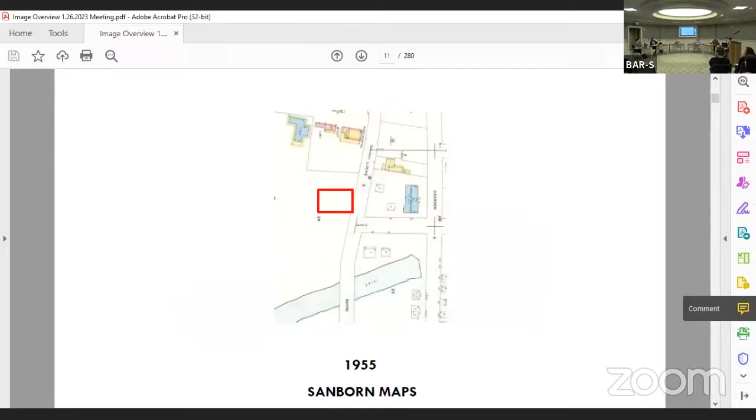65 Barre Street is requesting conceptual approval for 3 new row houses. They are new in the old historic district. Here is the location on Barre Street, an existing site photo, text of Barre Street, and then Sanborn maps showing the absence of structures in 1955. I will turn it over to the applicant.

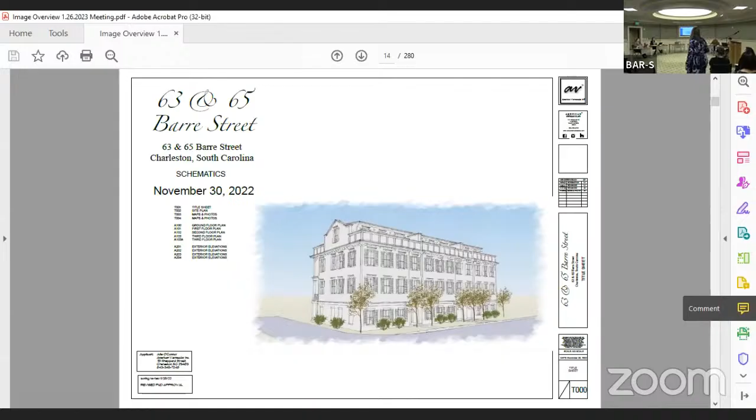I'm Julie O'Connor, the designer on this project. I'm joined with Tim and Colin Colbert, who are the owners. This project started with the purchase of 2 parcels of land, one of which has a 1-story ranch house on it, the other undeveloped. One of the properties is in the Halsey Park PUD, and when the Colberts purchased both properties, they incorporated the second property into the PUD as well. So now both properties, now subdivided into 3 parcels, are all in the Halsey Park PUD.

The Halsey Park PUD, just a quick zoning note—we've been dealing with and working with Lee—has its own zoning that is still in place, even though the ordinance has changed with regards to height and number of stories. So we've been working with Lee on that, and we do meet the zoning requirements for the height of the structure, overall height of the structure, and the number of stories. I think Frankie might be addressing that too. Could you go to the next slide, please?

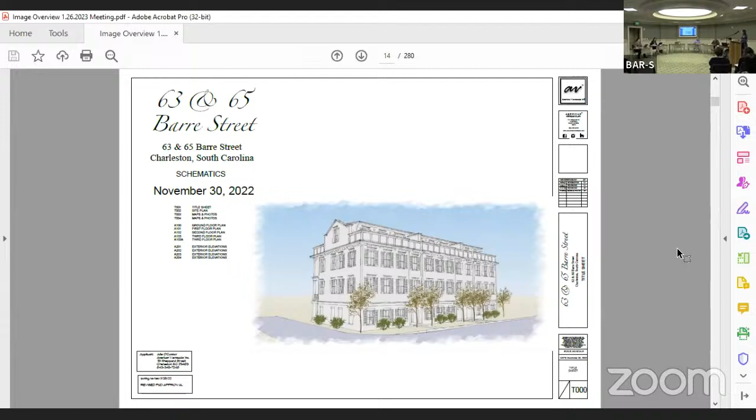We also submitted this project to the Halsey Park ARB. They have their own ARB, and they have approved it, and the HOA has written a letter of support. Specifically, they were very pleased that we're planning to leave some open space in the back of the property, since it's directly adjacent to and very close to this structure.

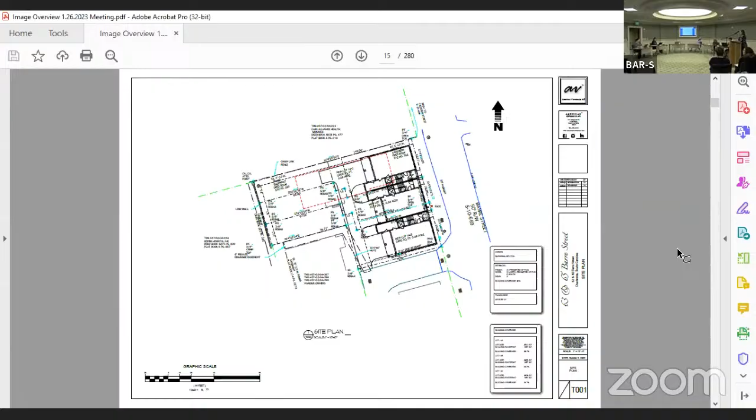And then as you go along Barre Street, there's a very large live oak tree, and then the Thomas Bennett house. So next slide, please.

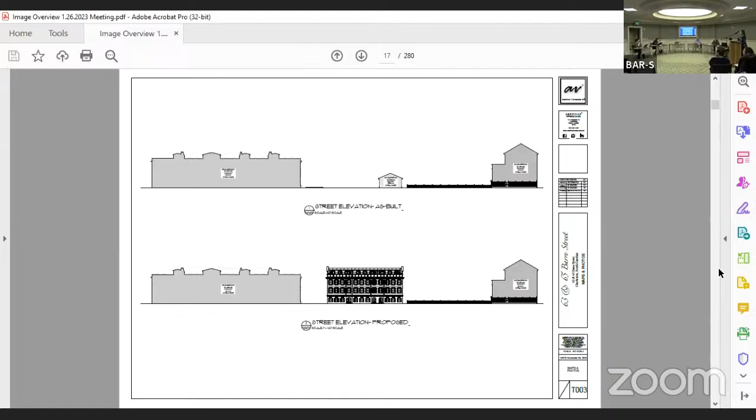Next slide, please. Can you go to the front elevation? So what we were hoping to achieve was a cohesive approach that sort of speaks a little bit to the existing row houses, but definitely has its own feeling.

So we would like to do siding. The other row houses are all stucco, so we thought a base of stucco would be a nice nod to that, while having the rest of the structure be siding.

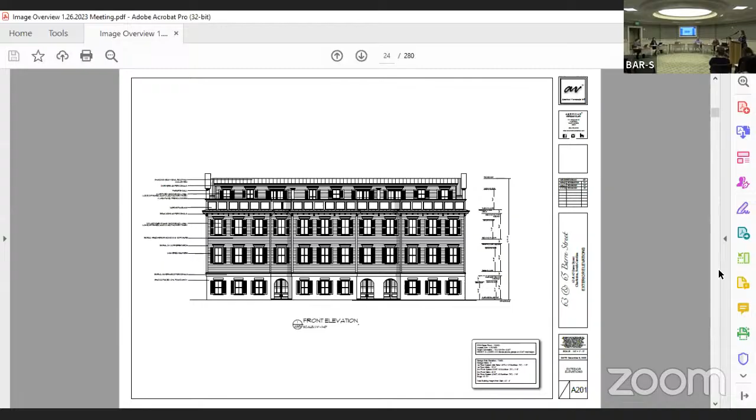We wanted to downplay the entrance in a way and not have a large set of stairs coming down, so we have sort of a recessed entry that sort of speaks to some of the streets like Tradd Street.

Next slide, please. And then this half story on the top, we wanted to set back, especially from the street, but also give an opportunity for maybe some outdoor space on the back. So you can see that we sort of set the half story towards the middle of the structure to get it away from the street and to also allow for some outdoor space on the back.

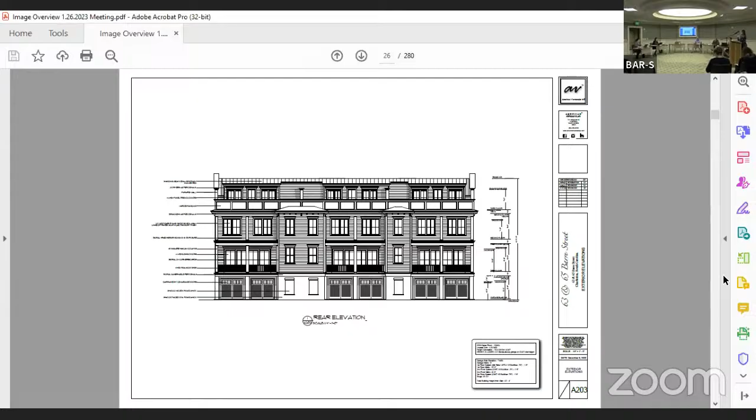Next slide, please. And then on the back, we have some porches and some nice elements there to enjoy that green space that we've created in the back for all of these properties to enjoy.

I'm not completely sure that's the way we're going to go with it, but you can see this kind of concept on the other row houses on Halsey and on Barre, and I think we'll continue to work on that. Definitely want to give them some privacy, but it probably doesn't need to be quite so tall.

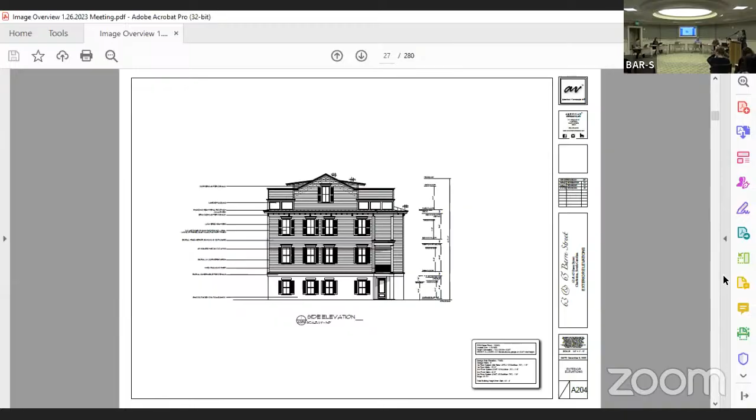And then we just did a few models just to show sort of how this would look. So you can just go through those from here.

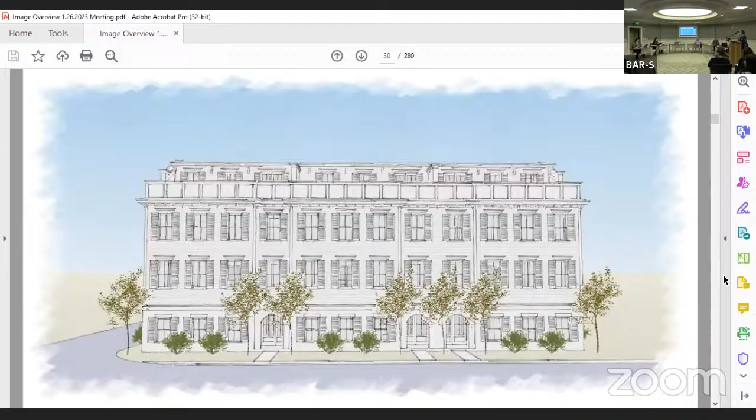And we just sort of took this parapet wall idea instead of a railing up top, and just started playing with some of those elements as we're working on the height, scale, and mass.

I'm here for questions.

Do my fellow board members have any questions for the applicant?

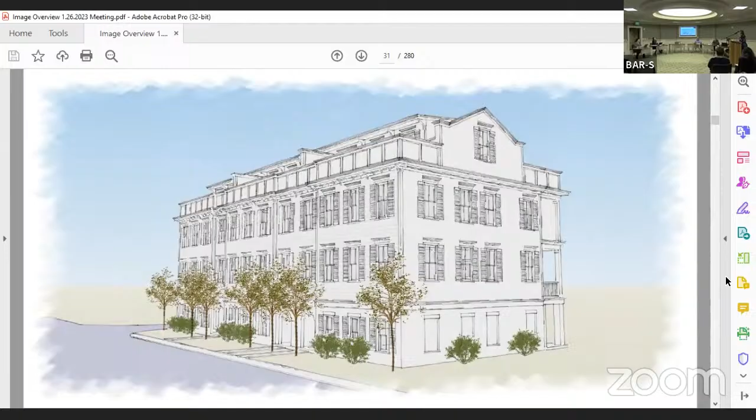Julie, you said you do have the blessing already of the Halsey Park. Yes. We have a letter of approval. And I apologize, I thought I had put it in the folder to be included in the slideshow.

So what system are you using for your demising walls? There's no parapet penetration at the roof line or anything like that, right? Right. We're just, the whole, you mean for dividing the two structures from each other? Yeah. Yeah, it's a double wall. Shaft wall.

I have a question regarding the railing at the top level. You said you could study whether or not it was railing or panel. What led you to go more panel than railing? I'm just wondering about massing and transparency. Yeah, I'm still kind of playing with it. I'm thinking whether it's a parapet or whether it's open or a combination of both. Whenever you have this flat roof type situation with a siding type of structure, I was just looking around in the city and seeing what I thought, and mostly they were parapets. Thank you.

Any other questions? Okay, we have no written comments. Do we have anyone speaking from the public?

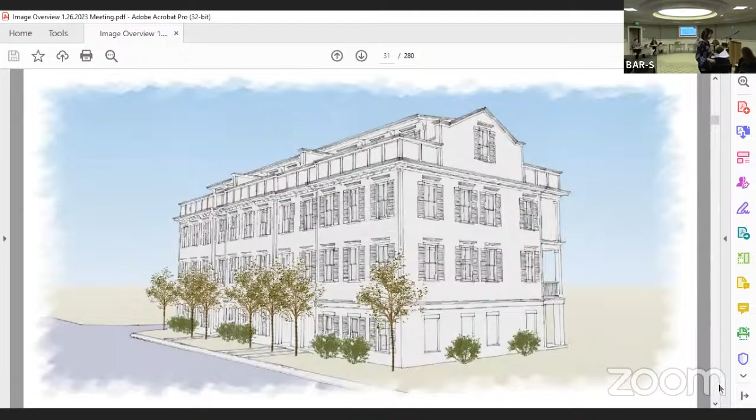Any more speaking from the public? Frankie, if you'll give the city staff comments and recommendations, please.

We did speak with zoning and they have confirmed the proposal is in compliance with the PUD and is within its allowed height.

Staff has met with the applicant and discussed a concern over the front entries, which is that the proposed arches screen the entries too much. Staff suggests omitting arches in lieu of squared off openings, centering a single entry door with side lights and arches, and or using a stained door system to make the entries more visible.

Applicant expressed they were willing to study this concern. Additionally, staff and applicant have discussed pulling back or angling the separation walls at the roof deck on the front of the building. These walls need to be scaled back or scaled down on the front of the building.

At the second floor rear of the building, the design creates what appears as infill porches. Staff suggests revising the exterior siding at these locations to be a larger lap siding and to potentially include a recessed panel railing like above. Staff also suggests restudying the detailing of the roof deck panel.

Staff recommendation is conceptual approval with staff comments and a final review by staff. Thank you, Frankie. Julie, did you want to respond to or clarify anything raised in the city staff comments or public comments? Yes, thank you.

Yes, we did meet with Frankie and Tori, and they did give us this list that we feel that we can address. We agreed with some of the comments and felt like there was definitely room to restudy these elements, and we're happy to do that.

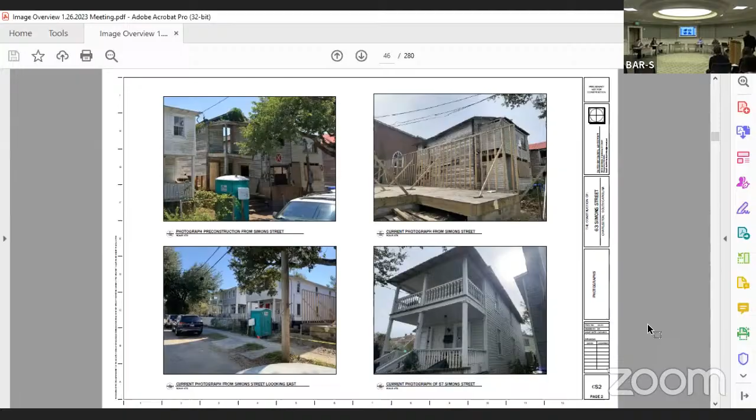I think we've gotten pretty close. One of the initial comments was with respect to the roof of the porch. Keep in mind that when we started on the house a year or so ago, the second floor porch was infilled. Our design now has the porch open on both levels, which I think is a dramatic improvement and much closer to the original design.

But the staff comments dealt with the actual roof pitch of that porch. The property here, farthest east, I think is the most original of all the structures, and that has a hip roof. You can see very clearly that is what my design shows, exactly that. So I think we've been able to maintain that. That's what I submitted, which was a concern from the staff at the first review.

Second was the idea of the rehab, because of the design of the house it's no longer a duplex, it's a single family residence. So on the first floor we propose a single door rather than two doors, which would have been in the original design. There's precedent for that in the house just two doors down - a single door with two windows, exactly what we have in mind. Seems silly to have two doors when you're just walking into the same room. So that's our position. Of course, all of this is open for discussion.

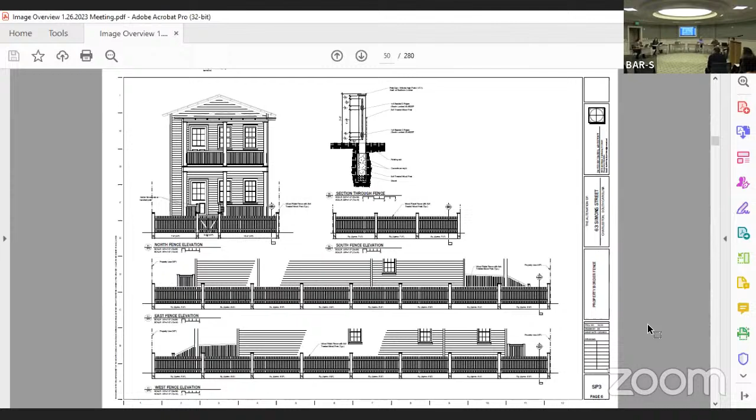The originally approved demolition on the original house—there was a front portion. This front mass to the right, we determined was not original to the structure, and we approved that it could be removed and the front porch restored.

If I can add to that—the previous submittal had a mass approved. It was essentially this, so for me to push back a little bit, I've been able to talk the owner into removing that in entirety, having double open porches, which was the original design.

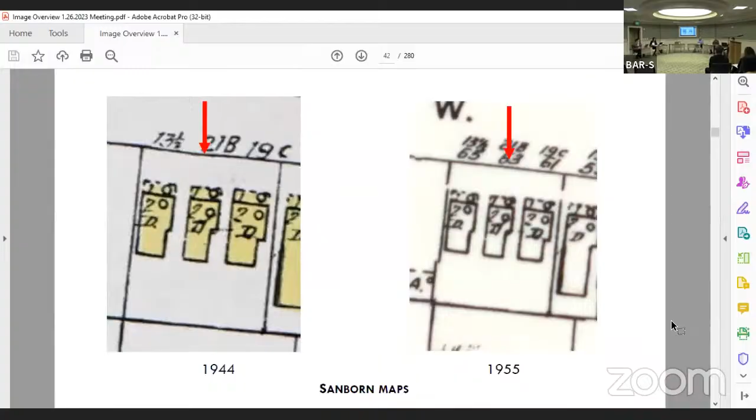Any other questions for the applicant? Do we have anyone speaking from the public? We had no written public comments submitted either. Frank, could you give us the staff comments and recommendations, please?

Staff did a little thinking about the two front doors to see if we could determine if it was originally built as a duplex. We haven't been able to confirm it, but the lot was bought in 1944, and the 1958 directories list two people with two different last names, but don't indicate a unit A and B. So we haven't been able to determine if it was a duplex when built or later converted.

Our comment was that the previous board motion adopted five staff comments, but we don't feel these have been incorporated. Because of that, we are recommending deferral.

Mr. Richards, did you want to respond to or clarify anything raised in the city staff comments and recommendations? Yeah, I think I've addressed each one of those comments one by one. For example, the roof comment—the initial comment from staff was that the roof didn't match the original design. Well, I think I've shown that it does.

So I've gone through each line item in the staff comments and assessed that they were not necessarily being followed—or that's probably the wrong word—but were received. I've offered to meet with the city and go through those in a discussion outside this, but we weren't able to do that. So I hope we can keep this moving forward, and if need be, work through the details with staff directly, if we can get at least preliminary approval here with final details to staff.

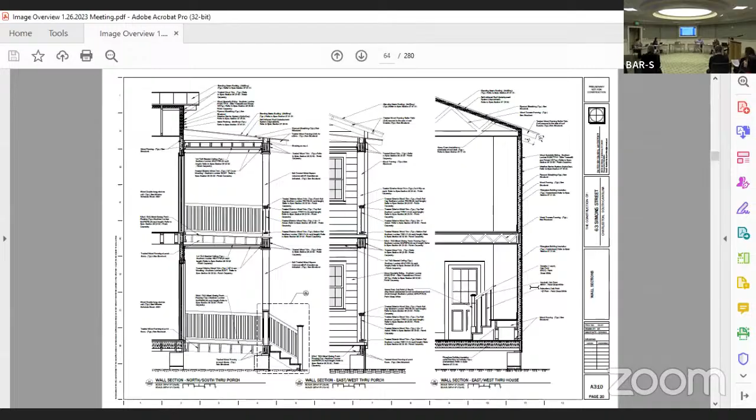Yeah, well, yeah. One thing I didn't hear, and again, thank you, Mr. Richards, for taking this on. I think I told you that last time. Yeah, we really appreciate that. Sure.

The one thing I didn't hear you address, maybe I just didn't hear it—and by the way, when I'm not looking at my phone I have the drawings, but I forgot my tablet—the brick bases at the columns, I didn't hear. Did you address that? I don't think I specifically addressed that, but I can. Real quick?

Yes. So that brick is not original. There's no way—see, it's got this pier here. It's not anywhere else in any of the other buildings. The stairs are wider. The brick is... there's no way it's original. It wouldn't have been constructed like that. It goes deeper into the porch. It's pretty poorly done as well.

But okay, you know, that was supposedly original. I'm quite certain that all the original stairs were all wood, standard stairs. And then the columns were full height—square, chamfered wood columns, full height. Okay.

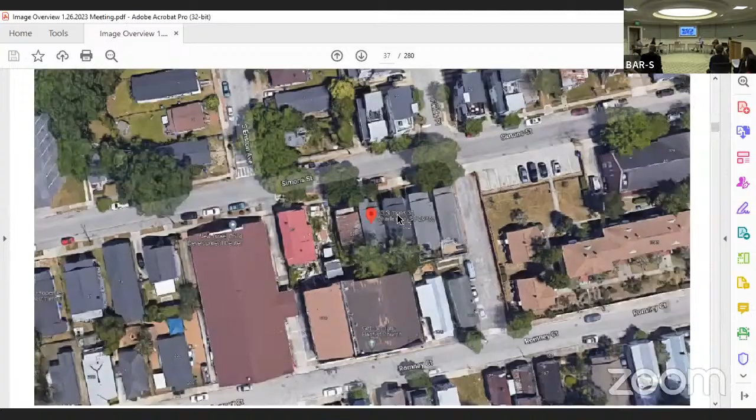The second point, Frankie, could you go to that Google Earth view I did, have a look down at... yeah, then that's not zoomable, is it? There should be another one. That's getting there. Is there... well, that might be as clear as it can get. Starting to get blurry at this point.

Yeah, I would say there is one thing. I don't think staff's comment about the pitch on that porch roof is ill-conceived, because fortunately when this picture was taken, the shadow line is just about right. You can kind of see this angle right here. And that's not a 45-degree angle, so pardon my French, but that's what's called a bastard hip, when two different pitches are converging. So I believe this angle is indicating it's not a true side, front hip, side hip condition.

In other words, they're not converging at the same pitch. Two points to add to that: the lines are 45, but they don't hit peak. So I copied the one at the eastern end. If you look at that porch, it's pretty well intact. I just made the assumption that was probably what it was originally. I see your point though. I'm not sure if that's been altered since, because they did significantly alter it when they put the addition onto the front, whether they modified that as well.

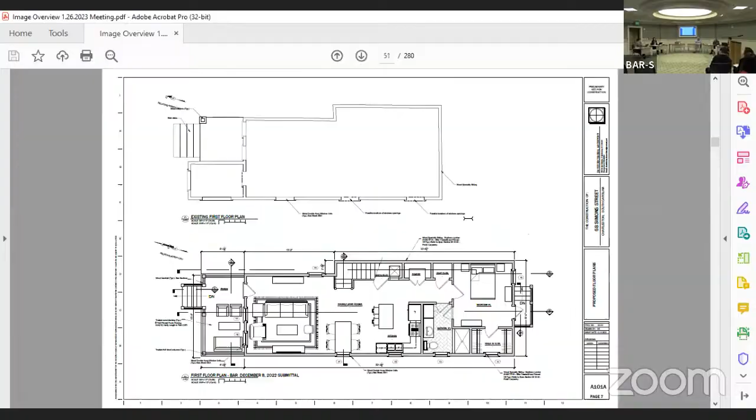Okay, agenda item number 3 is 12 Cannon Street. Frankie, give us an introduction and overview when you're ready. 12 Cannon Street is requesting conceptual approval for a new rear addition and restoration of the existing house, dated category 4 in Cannonborough-Elliotborough, circa 1870, in the Old City District. Here's the location on Cannon Street, some existing site photos, context of Cannon Street, and a Sanborn map showing the history of the property. I'll turn it over to the applicant.

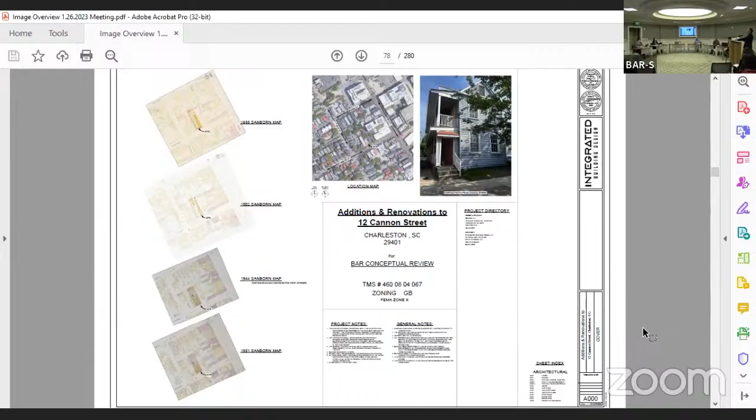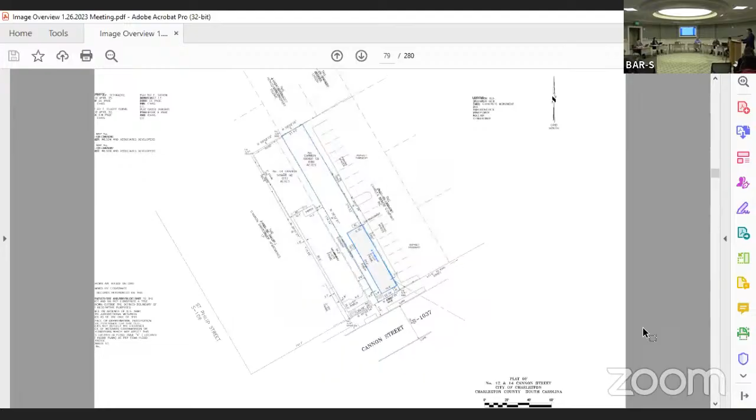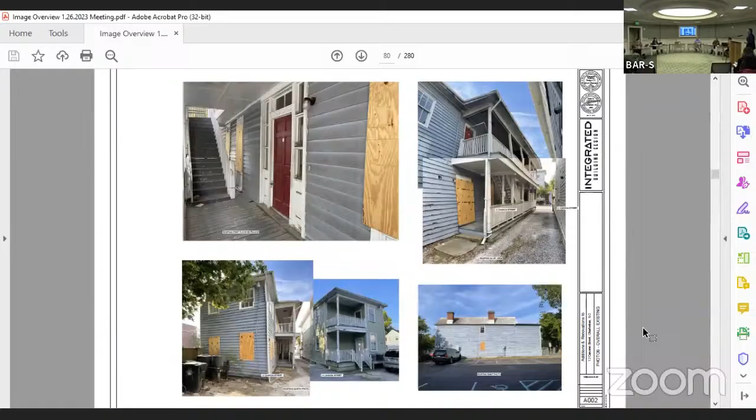Thank you, I'm Eddie Buck, representing Brahma. Unfortunately our architect had something come up at the last moment and is unable to be here, so I'll be presenting on his behalf. As stated, the original structure predates 1880, with an addition that predates 1940. If you could go to the next slide - as you can see in the survey, there's a small drive between 12 and 14 Cannon Street. 12 Cannon Street is about half as deep as 14 Cannon. Next slide please - in these photos you can see the structure is in poor condition, certainly needs attention sooner than later, and unfortunately in the last 6 months has experienced some vandalism. Next slide, please, showing more photos of the condition.

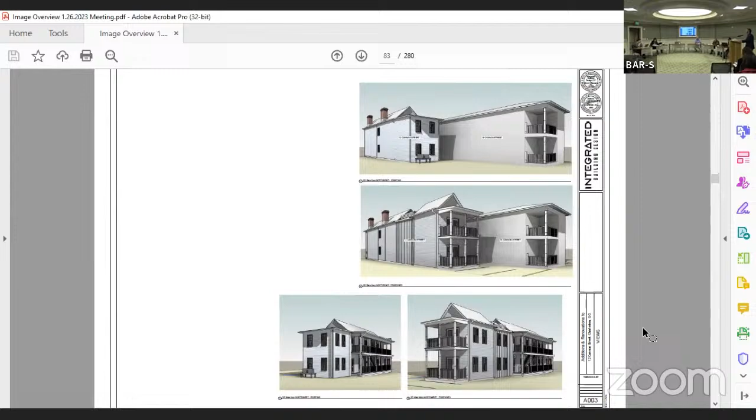Just showing a little bit of the context of the adjacent building and our current building.

Here's showing the existing condition. You can clearly see in the top left what was the original historic structure, the addition with the sloping roof that was added, the front elevation, and then down below showing what we're proposing. You can see from Cannon Street that there are no proposed changes to the front elevation.

It's strictly to restore and preserve the current look. As for the design, what we've tried to do is put an emphasis on what was the original historic structure, what was the first addition, and then what we're proposing as a current addition that ties more to the original structure, but also adds a porch in the rear to add some cohesion between 12 and 14 Cannon Street.

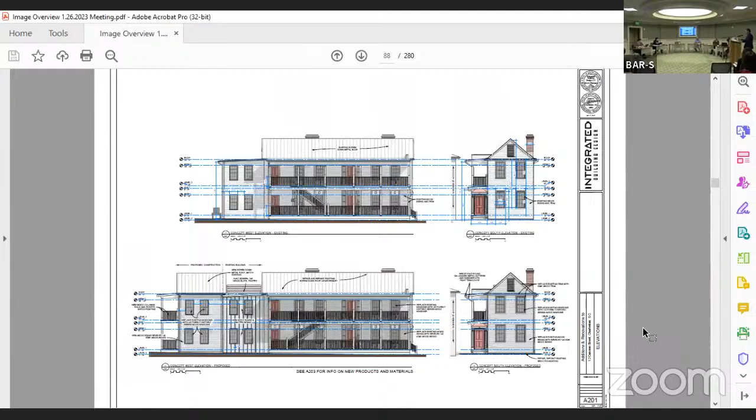Here gives a little more definition of how we're really trying to put an emphasis on what was the historic building, using the first addition as really a hyphen, keeping the flat roof on that portion, going to a vertical board and batten siding, and then using some screening above for the mechanical units. To the right of that, the new addition goes back to a pitched metal roof.

It ties back to the original structure with the traditional wood siding. Just again, a little bit on some materials.

Again, with that, the main emphasis on this project is to restore the project. It is an older Charleston single, and the addition is to add some flexibility with the floor plan. So, with that, I'm happy to answer any questions.

Do my fellow board members have any questions for the applicant?

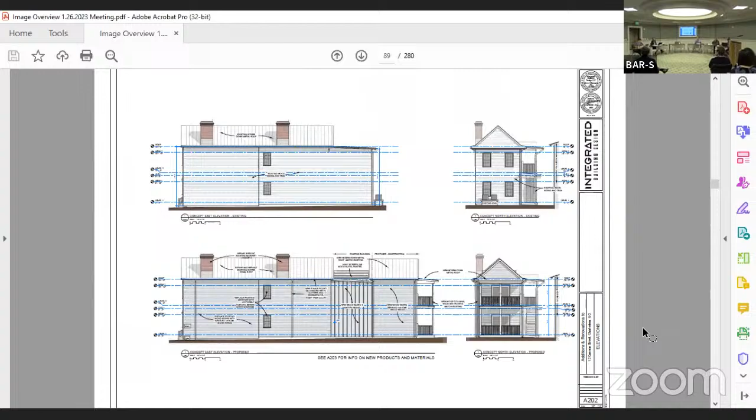Anyone else from the public? Thank you. Would city staff give their comments and recommendations, please?

Staff had two observations. There was a note on removing trees, and removal of any trees must be approved by zoning. Also, this project did receive a special exception from zoning for the addition.

Staff comments: we recommend retaining the existing siding on the hyphen area, lowering the roof on the new addition to be subordinate to the main body of the house, differentiating the addition from the main body of the house. Siding and windows should be replaced on a case-by-case basis depending on the condition of each.

We did have that question about the chimney rework, but also because on the drawing where that was noted, it looked like the chimney changed color, so we were just making sure that didn't indicate a portion of the chimney being retained and a portion being rebuilt or something along those lines. But it could just be a drawing. I don't believe so — I think the changing color is more from a waterproofing system that was put on. I understand, we just didn't know what that indicated.

And then all features should be repaired rather than replaced wherever possible. Staff recommendation is for deferral with staff comments.

Thank you, Frankie. Mr. Buck, would you like to respond to or clarify anything raised in the public comment or these staff comments and recommendations?

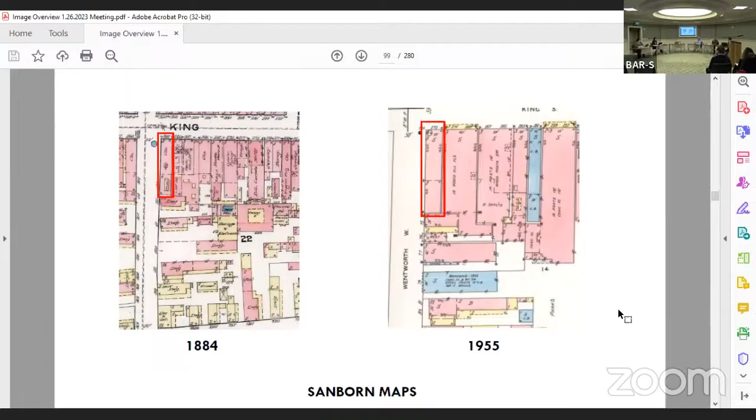This is the location on King Street, existing site photos, context of King Street and Wentworth, and a Sanborn map showing the structure. I will turn it over to the applicants.

We're looking for conceptual review of 273 King, some light modifications to the north facade. The building on the corner, the southwest corner of Wentworth, these alterations are part of a white boxing of a vacant tenancy that the owner would like to market for lease. The building is currently occupied by a clothing store here and then a hotel above called the Green.

On the bottom right, you can see the interior extents of the suite in question, projected onto the exterior. We have these three storefront windows and this recessed entrance. The building was built around 1840, and it's been a clothing store for a lot of its history. This is the existing plan, with the three large storefront windows in question and the vestibule here.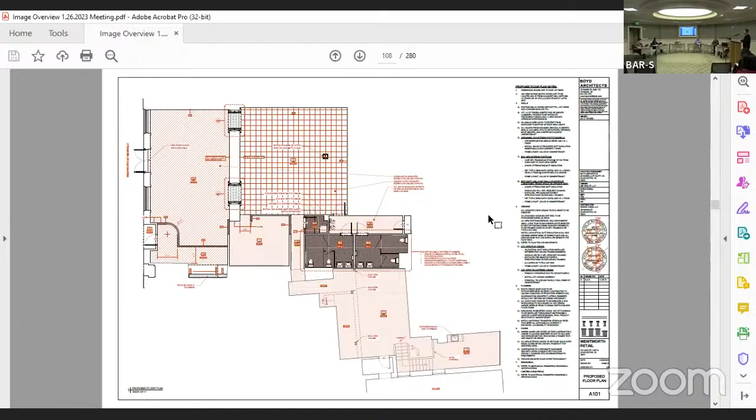Let's go to A101. So you can see here we're proposing dropping the sill of the middle storefront window and introducing a new entry to the suite. This is much more conducive to a retail setting and better street presence for this suite. Practically speaking, the existing vestibule will be partitioned off and create a common utility room, since there are electrical panels and other utilities common for the whole building. This creates a shared utility room without having to go through another tenant space.

Let's go to 201. This is the existing elevation. The four middle openings are the suite in question. As best we can tell, the facade openings have been modified in the past a decent amount. It's tricky to tell at this stage, but there's a window in colored green that's filled in right now. The vestibule in our suite is not original - we have a photograph from 1901 where it doesn't exist. There's actually a window here, this window doesn't exist, and there's a window here, kind of where the floor plate is now. That photo from 1901 shows it appears as though it's one of these windows, filled in by 1901, so we can assume it was a window, then filled in, and now it's this vestibule.

Let's go to A201. There are really two things: dropping the sill of that middle storefront window, and adding new entry doors, which will be two-panel painted wood doors with the top panel being a full light, which is common on King Street - you see it throughout. The other thing is removal of the transoms, which right now are filled in with plywood and don't match the rest of the building, which has glass with fabric on it. So we're taking out the plywood and putting in glass. The recessed entry vestibule remains unchanged from the outside; it just needs interior reconfiguration.

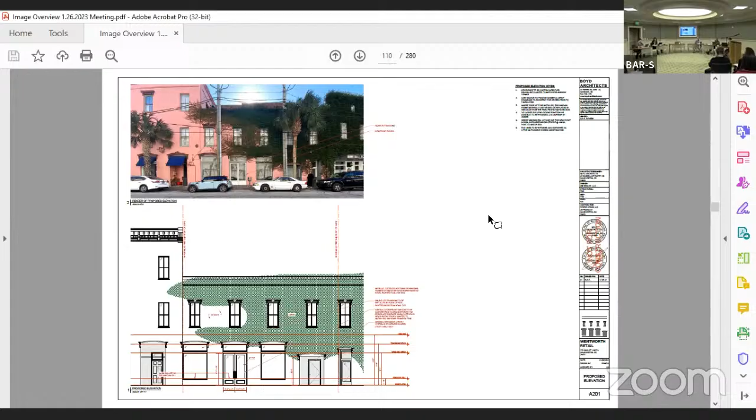Anyone else speaking from the public? All right, and we have no written public comment. So Frank, you can give us city staff comments and recommendations, please.

Staff just wanted to make an observation that the proposed change is a sensitive operation that respects the width of the existing opening, and we think this change to be reasonable and reversible. Staff recommendation is for conceptual approval with a final review by staff. Mr. Boyd, did you want to respond to or clarify anything raised in the public comment, staff comments?

Public comment and the applicant's presentation is now closed. We'll move into board discussion and a vote.

Yeah, I definitely see the points. I think there's a practical issue here. Number one is the insinuation that we're approving outswing doors ahead of engineering. Number two, the fact that there are going to be doors that are basically presented at sidewalk level. I think it'd be fairly short-sighted to think that there's not going to be an application for an awning within a year. Weather starts hitting that door, water starts hitting that door, it's potentially going to be an issue. And I'm not saying that we need to be preemptively considering an awning, but I think practically that might be something we might be looking at soon.

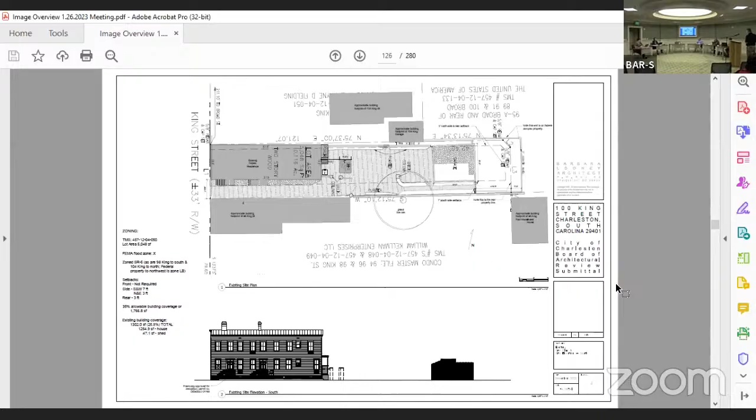Next slide. This is the original site plan. Next slide, these are the walls that are existing now. Next slide, a better picture of them. Next slide, more pictures of it.

This is our proposed site plan. Next slide. The top is our original plan for the guest house, and the one below it is the elevation with the revised floor plan. Next slide. The bottom left is the first floor, the top left was the original second floor, and the bottom right is the revised one we're turning in now, between the walls, and the second floor.

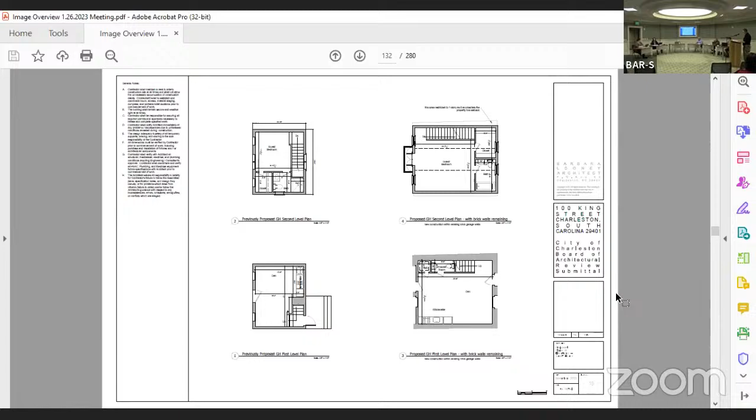On the revised plan, we also did not put windows on the north and south elevation on the second floor, to minimize the impact for the neighbors. Next slide. This is the existing brick wall elevations; upper left is the east elevation, the right is the west, lower left is the north, and then the south. All the walls are two courses wide and are unreinforced brick.

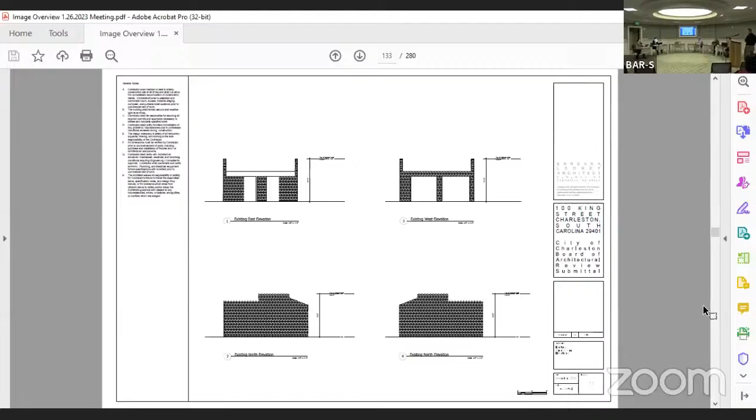Next slide. The previously proposed west elevation is upper left, the upper right is the currently proposed west elevation, the lower left was the previous, and the lower right is the one we're proposing today. Next slide. These are the previously and currently proposed east and north elevations. Upper left is the previous, upper right is the one we're proposing, and the lower left is previous with the lower right being what we're currently proposing.

Next slide, that's us, thank you. Do my fellow board members have any questions for the applicant? I'm sorry, your name was Tom Bellino—is it B or B? B, Bellino, yes ma'am. No questions?

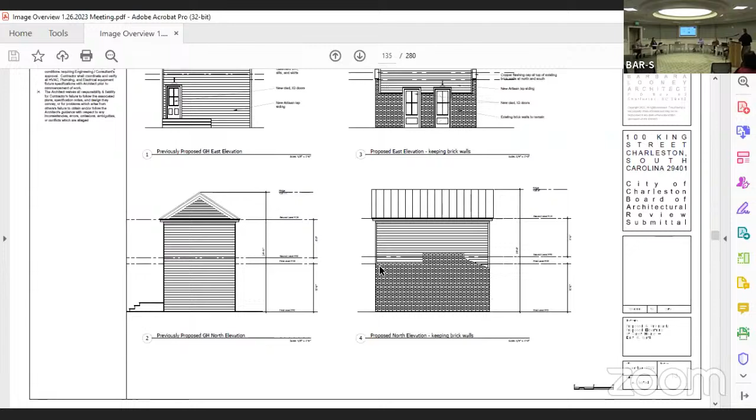Was there a particular thought behind reorienting the direction of the roof ridge? I'm looking at your previous and proposed west, or front, elevation. On the proposed one, the orientation of the ridge changed—before it was side to side, now we're presenting a gable. I don't see any reason for that. I don't know if it's because of the way the original building, the original brick—go back a couple slides, Frank, if you would—where it shows the pictures, you can see where the old roof used to be. So that's why we're changing the roof this way, because it might look kind of odd going the other way.

Any questions? Thank you. Okay, do we have anyone speaking from the public? We have no written comment.

Laurel Bay with the Preservation Society of Charleston. The PSC appreciates the applicant's response to the board's previous direction to study retaining the brick ruins as part of a new guest house design. We feel this proposal warrants continued study of how the guest house engages with the ruins to better distinguish the two periods of construction. The proposal to fill the former footprint creates undesirable proportions that read as an unfortunate evolution of an existing garage. The scale and proportions of the previous design are more characteristic of traditional dependencies in Charleston, and we think there is an opportunity to pursue the original design direction while incorporating the ruins as a unique architectural element. Thank you.

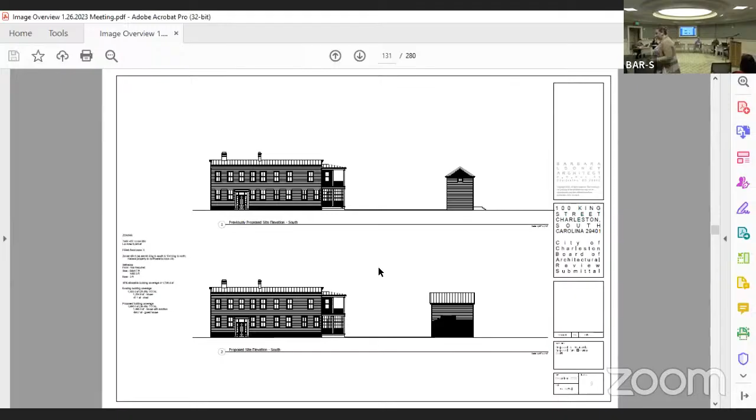Any other public comment? All right, Frankie, if you'll give us city staff comments and recommendations, please.

Okay, staff just had two observations that we felt the previous board motion has been addressed, and that the proposed garage is subordinate to and architecturally compatible with the existing structure. Therefore, we will recommend conceptual approval with final review by staff.

Thank you, Frankie. Mr. Bellina, did you want to respond to or clarify anything raised in the public comment or the city staff comments and recommendations? We were just trying to do what the board was trying to do, you know, and keep the original.

Public comment and the applicant's presentation is now closed. We'll move into board discussion and a vote. I have a question for staff, or maybe some board members that I wasn't there. But the ruins, do they show, or is it characterized as the ruins from the 40s? Or was it mandated that they keep them? Are they historic?

Staff felt comfortable approving it. Tori was going to approve the demolition at a staff level. But when the board reviewed the proposed project, they felt that the ruin should be restudied to see if it could be incorporated into the design.

I don't remember if we were able to verify the age of the ruins, other than that they weren't on the most recent Sanborn we could find. There was some visibility concern. I think where we landed, in a semi-uninformed state, was that we know the brick is old, but we don't know the age of what's there, or whether it may have been an older structure modified to be a 2-car garage.

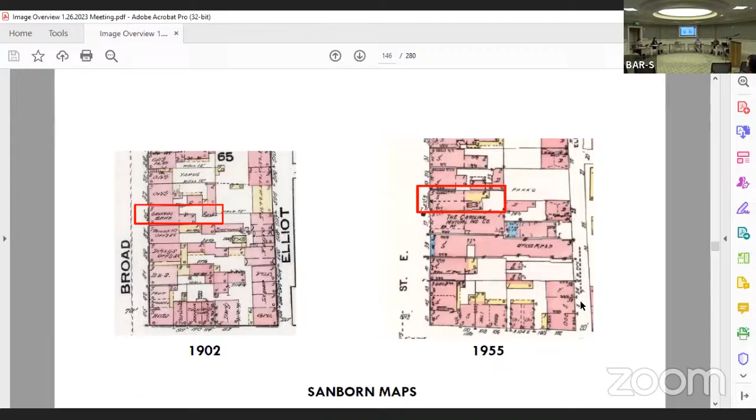Good evening, my name is Rhett Morgan. Not sure what happened, the summary seems like it was cut short. So just real quick, the primary scope of this project would be to reconstruct this storefront there on Broad Street. And then the second component of the project is a small addition at the rear as well. So just to quickly give you a quick overview, the primary structure, a 4-story masonry structure there that fronts Broad Street, was constructed in the 1700s.

There's a series of somewhat unfortunate additions and modifications that were made over time towards the rear of the property and also on Broad Street as well. And to make matters worse, some of the past owners had neglected this structure pretty greatly, so it's in pretty poor condition. The good news is there's still quite a bit of historic elements and fabric that are intact with the interior, and it really has the opportunity to be a real gem. So we're very excited about this opportunity. I should probably mention too, my clients will be pursuing historic tax credits with this project as well, and coordinating that with the state historic preservation offices.

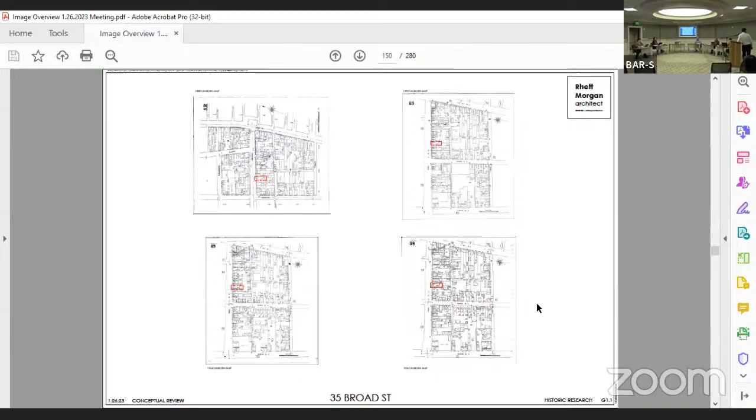So with that said, if you don't mind, the clicker - I don't have the clicker today, I misplaced it, sorry. The Sanborn maps, you can kind of see the evolution of different additions and whatnot at the rear of the property. If you can flip to the next slide, please. And then so we have some older photos. The photo on the right from the 40s is basically the inspiration of what we're trying to bring back for that storefront on Broad Street. The one on the left is a photo from the 70s that kind of just shows some of the evolution of what's happened down on that street level over time.

And if you don't mind clicking the next slide. So the bottom right image is what we have today. Over time there's basically a stucco finish that's applied at that ground level over the original brick and wood storefront. There's nothing left of it.

The openings obviously are still at those historic locations. So the idea is to go back to those locations and reconstruct as best we can with that image that we have along Broad Street.

Then the top left photo is taken back from Elliot Street. You can see some of the additions that were done, most visible being this two-story CMU block structure, and you can see peeking out another addition. The image to the top right is within that parking lot off of Elliot Street, a little closer view showing the state of disrepair, unfortunately, to the structure.

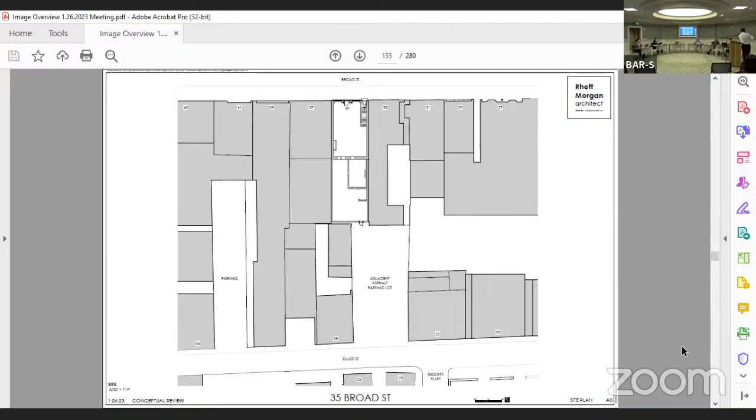Just quickly, the site shows how the property sits in relation to Broad and Elliot and that parking lot, giving you a glimpse of the rear of the property there. A good portion of the building, as you can see, is kind of tucked back behind 29 Elliot.

So if you can go to the next slide, please. So really the scope of the work on the first floor is primarily just the reconstruction of that storefront on Broad Street. If you can go to the next slide, please.

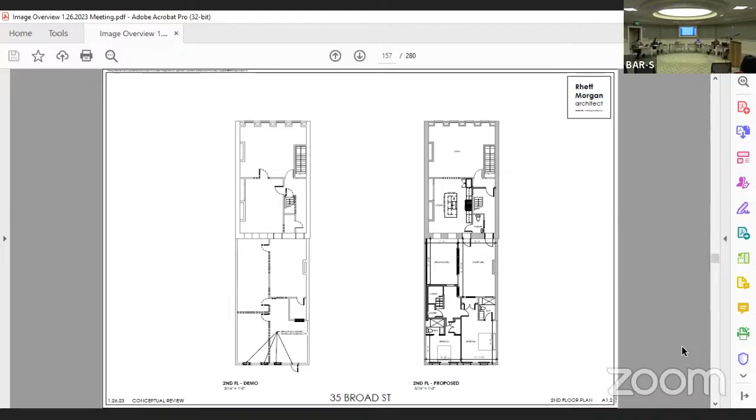And then you can see here this interior courtyard basically that we're trying to create, to capture some of those original openings to the original structure so we can bring light back into that space. And then the footprint basically of that addition.

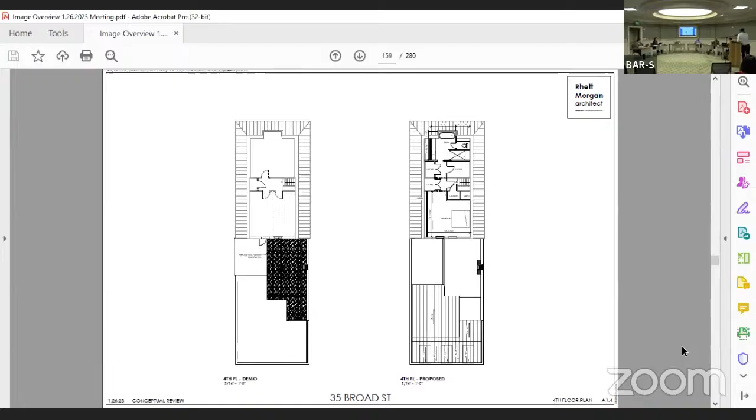If you don't mind, the next slide please. You can see the darker element is where that roof will be popped off, and then basically a void created there. If you could slide - just skip along.

Next one, please. Mr. Morgan, you've got about 2 minutes left. Oh, okay. So I think it's pretty straightforward - it shows the reconstruction of that storefront on Broad.

If you go to the next one, please. This really isn't visible, you can just keep looking through - this is just more information. So you can kind of see the simple gable form there of the addition, which is all that would be seen from Elliot.

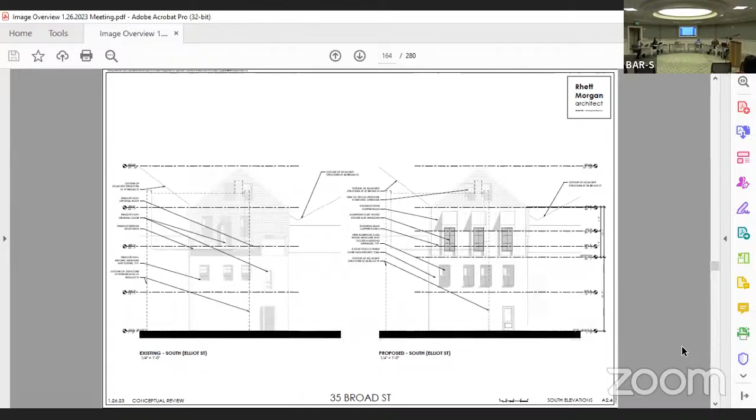Basically the concept is a simple gable form, shed dormers, trying to bring the scale of that addition down and retain the residential feel and nature of the structures back there. Standing seam metal panel, pretty simple detailing.

You can kind of see the outline of the structure on Elliot that basically obstructs the view there. Really none of this is visible - this is just for informational purposes. If you could click to the next one.

Sorry, it's very slow today. No worries. That just shows how it sits in the storefront, the streetscape on Broad Street.

This is not pronounced right, sorry, this is a little hard to read, but essentially you can see how this addition is tucked back behind that structure on Elliot. The intent of that form is to bring the height down, keep it subservient to the original structure, and maintain that residential feel of the structure back there.

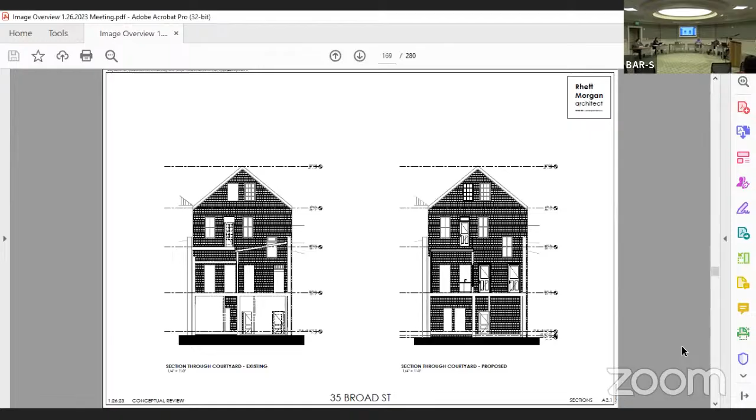You can go to the next slide. You can kind of see this is that roof we're talking about taking out to recapture some of the openings.

This really, obviously, we pulled away the building too broad, but just so you can see how this relates to the addition to the original structure and that simple gable form.

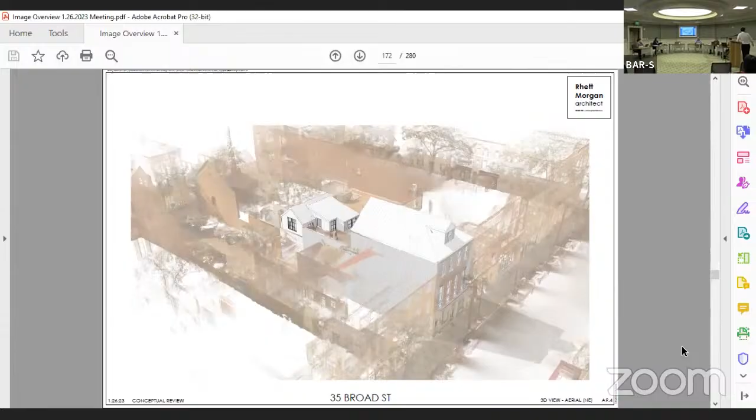An aerial from Elliott to show how everything relates. And an aerial from Broad. Obviously none of this is visible from the right of way, just to show how everything relates.

You can see that interior courtyard we're creating to basically reconstruct and capture some light into the back of the original structure. I think that's it, really.

Thank you, Mr. Morgan. Do my fellow board members have any questions for the applicant? Just a very quick one - I think most obviously your drawings of Broad Street were focusing on the storefront and revision.

The dormer is drawn slightly different up on the roof with that sort of circular, what might have been a fan light at some point in time. It shows on the 70s photo and the 40s photo. You're not changing anything? No, sorry, that was just a graphic error. Okay, I'll get that updated. I just wanted to make sure, because it's not drawn on there, that's not part of it.

No, the only change would be to that storefront on Broad, and then just rehabilitation. Gotcha, thank you.

And then the ground floor commercial, upstairs is 2 units? Yes. Okay, and then there aren't any zoning issues related to anything?

Anything proposed for parking required or setbacks? No, not as far as parking or setbacks.

So we are working with them as far as the number of units. There were 4 meters there, and so it'll go down to the current plan of 1 commercial tenant on the ground floor, and then 2 tenants in the upper floor - one at the second floor and the addition, and then the 3rd and 4th floor would be another tenant. So we're working with them, and depending on how many tenants we have, we might end up having to get a special exception just for the use, but as far as the volume, setbacks and everything...

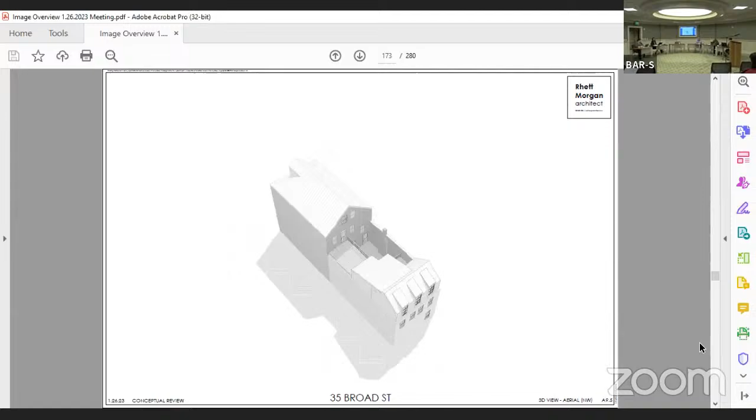Staff just wanted to make some observations that the proposed front facade is reconstructing a historic storefront, and that the rear addition will not be seen at the same time as the front facade. The proposed addition is differentiated and subordinate, and it complements buildings adjacent to the rear, including one with a copper roof that overlaps this slightly, complementing each other nicely.

Staff recommendation is for conceptual approval with a final review by staff. Thank you, Frankie. Mr. Morgan, did you want to respond to or clarify anything raised in the public comment and city staff comments and recommendations?

Sure. I appreciate the feedback. We were able to meet with Historic Charleston and Preservation Society to walk them through and get their input on what we're proposing, and we'll certainly take those comments into consideration in the development.

All right, public comment in the applicant's presentation is now closed. We'll move into board discussion and a vote.

Would you like me to do something for you? Oh, well, I can figure it out. It's a little screen, but I can just. It would be bigger, that was all. That's okay, my eyes probably see better there.

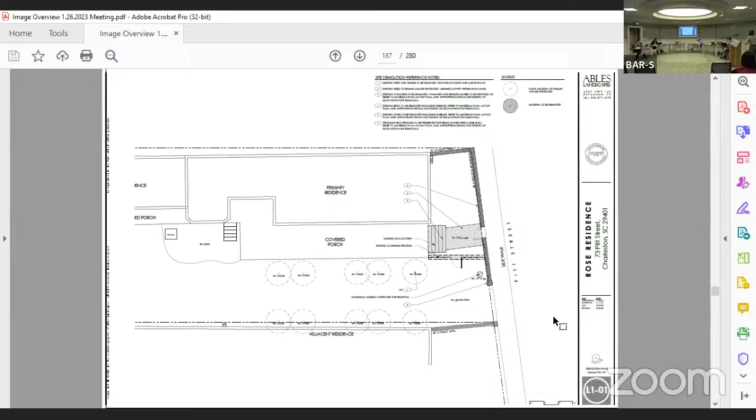This next page just shows the demo of the areas, removing that aluminum fence. The magnolia is already gone. The stucco knee wall while salvaging the ironwork.

This shows the overlay of the approved plan, keeping with the same footprint of the knee wall, but raising it up to an 18-inch knee wall made out of brick with that salvaged wrought iron. You want to keep that up, keep that, and put it back, but raise the overall wall height to 5 feet. Keeping the existing gate, but modifying it to keep with the aesthetic of how it is, adding a vehicular gate, adding a brick apron at the beginning, a ribbon brick drive with mondo grass in the middle, and

blue slate chips on the sides. And then regarding the steps up to the home, doing brick facade with bluestone treads and iron railings.

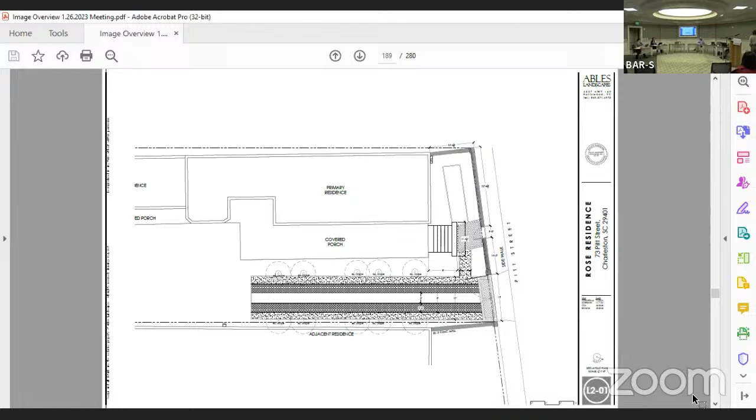Currently, there is a water meter within the rolled area curb of the sidewalk of their driveway, so we would be asking to move those water utilities over. To the next slide.

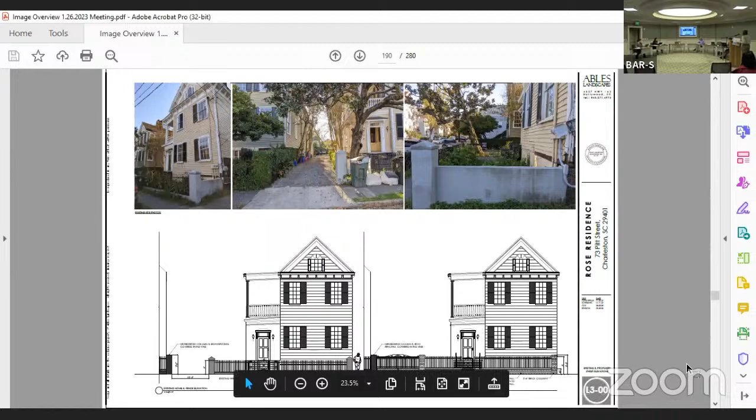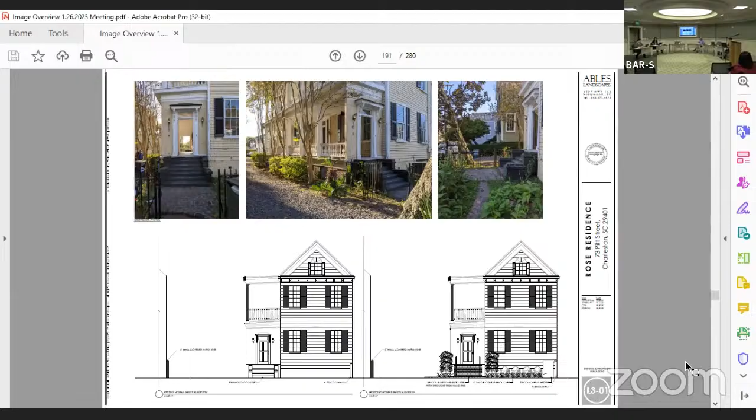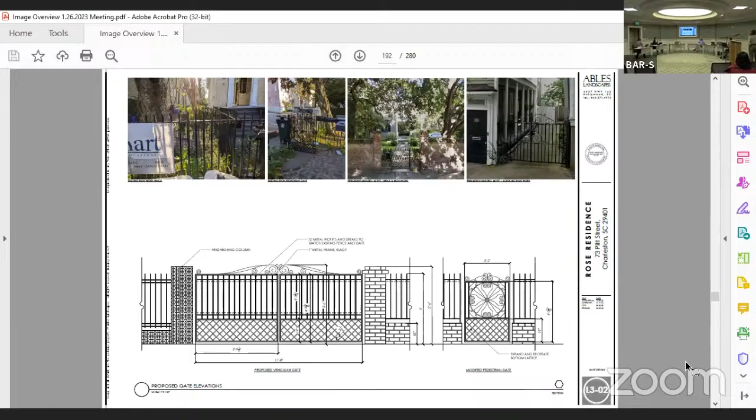Go to the next slide. And then these just show further details. They are requesting a 5-foot wall along that side where there's that 3-foot stucco wall, so that would tie into the new brick columns. As I said, the ironwork would be around 5 feet tall. They're asking for 5 feet tall.

The columns would be about 5.5. The new brick steps, just treads of bluestone, 2-inch thick bluestones, just a classic wrought iron with a lamb's tongue handle at the end, herringbone brick walkways, and then within the drive, a brick apron and a brick ribbon drive with slate chips on the exterior of that. I think that's the last one.

Do my board members have any questions for the applicant?

Are they going to do any kind of automatic opening device on these gates? Not that they have requested, no. Anything else? Thank you.

We have no written public comment. Do we have anyone speaking from the public? Yeah.

Laurel Fay with the Preservation Society of Charleston: This proposal appears to be generally well conceived. However, we would request more information on the thought behind this proposal, specifically if this is to address flooding concerns or just aesthetic reasons, as well as the age of the materials being proposed for replacement. We ask the board to require more information in a subsequent submittal.

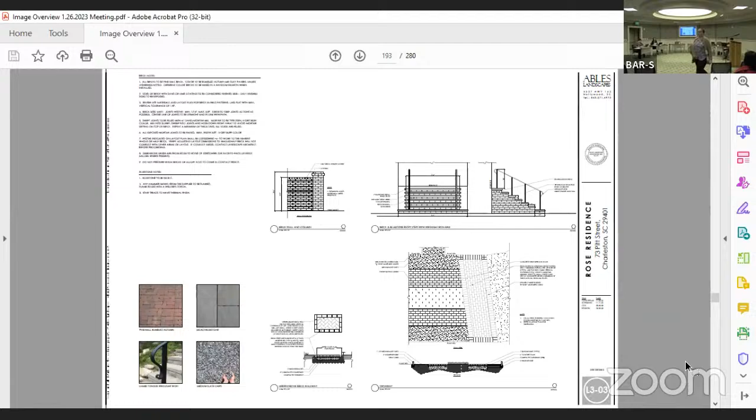Staff comments: the proposed wall and ironwork are appropriate for the location. The brick stairs coordinate with the proposed wall, and the gates complement the existing pedestrian gate. Unless this project is here only because it's a category 2 — if it were a 3 or lower, we would review it as staff. Staff is recommending a final approval.

Does the applicant want to respond to or clarify anything related to public comment or city staff comments? Regarding the public comment, they just love the aesthetic of the area. We use Carolina brick as part of all the brick surfaces. As far as date goes, I don't have anything on the ironwork, but we want to do it.

Public comment and the applicant's presentation is now closed. We'll move into board discussion and a vote. Mainly gonna look towards Glenn on this — this is kind of his wheelhouse. Deferring to Glenn, hear what Glenn has to say.

I think it's a nicely developed proposal, and the only real clarification needed is the age and scope of work on the older ironwork pieces that are there. Otherwise, I think it's all very appropriate for the neighborhood, and it sounds like that's what the clients are looking for, in terms of materials, and that's what she's adhering to.

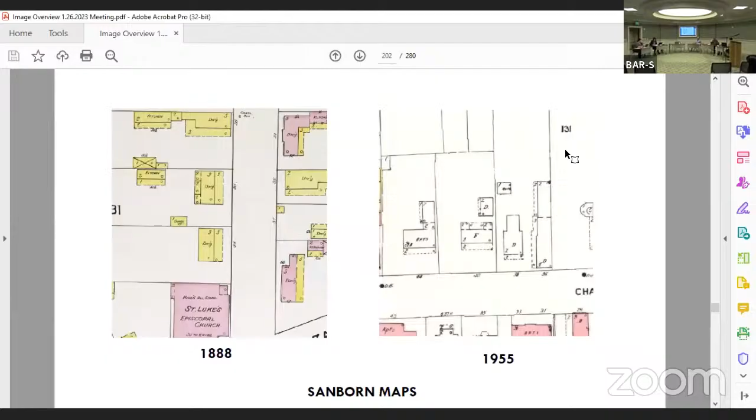Good evening, my name is Wolby McSwain, I'm the designer working with Ms. Neighbour on this project. Our proposal is basically to install a pool behind an existing garden wall in the rear of the property. To do this, we also need to complete a pump house to run the pool. We're going to bring out the wall off of the existing wall, matching the fabric and construction, and nestle a little pump house in this area next to the pool. I believe the next slide will provide further detail.

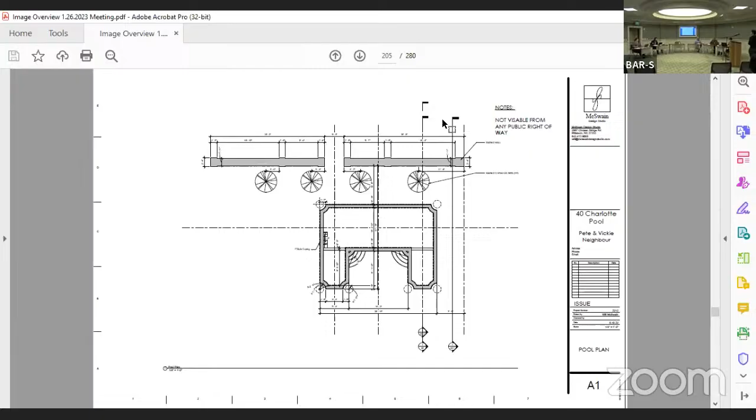Our design intention for this was to have nothing visible from the public right of way. The wall would be coming out here and then adjoining the pump house itself, and then continue on through.

Here's an elevation of the proposed wall. Again, we were going to match construction and materials with this wall, matching the existing stucco and the brick detail of the garden wall.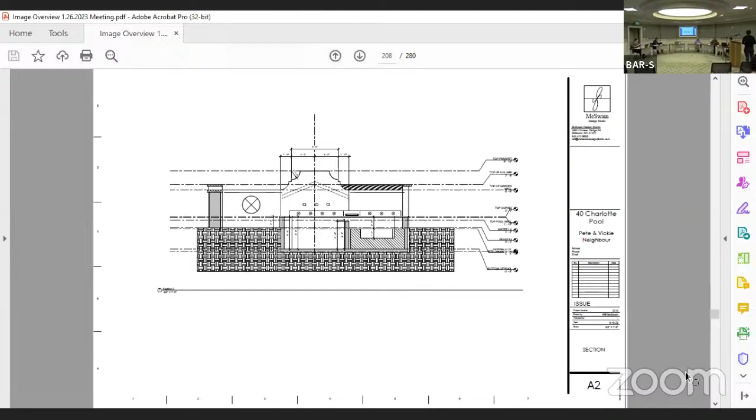Here is a study of the sight line from the public right of way to show that the roof line of the pump house is going to be just below the public right of way. That's all I have. Do my fellow board members have any questions for the applicant?

You don't have any photos within your presentation, is there? Of this current site behind the house, I can provide this for you.

Thank you. Site plan wise, I think we've approved some other things not too long ago, an existing deck behind. Well, there's been sort of driveway landscape approvals, and I thought part of that approval was something to do with the wall. I don't know if that stuff has been done yet or not, but it would be nice to understand fully what's happening on the site.

Also, I don't really understand why the survey doesn't show the full property, which should be a standard. The full property needs to be on there. And then there's a grand tree back there that's been whited out of the site plan, so I don't understand what's happening there either.

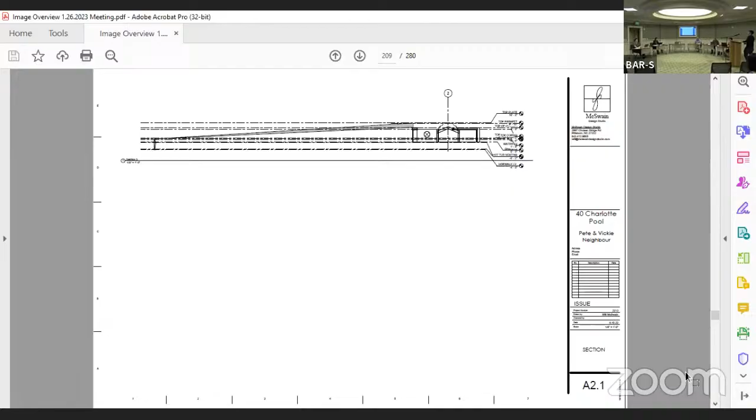So if you go to A 1.1 — right here, this sycamore, no, the white circle. There's a white circle where a tree's been whited out. I do not know, this was the site plan that was provided.

My purview on this project has only been coming in to design this pool. Any other questions?

Thank you. Do we have any comments from the public? We have no written comment.

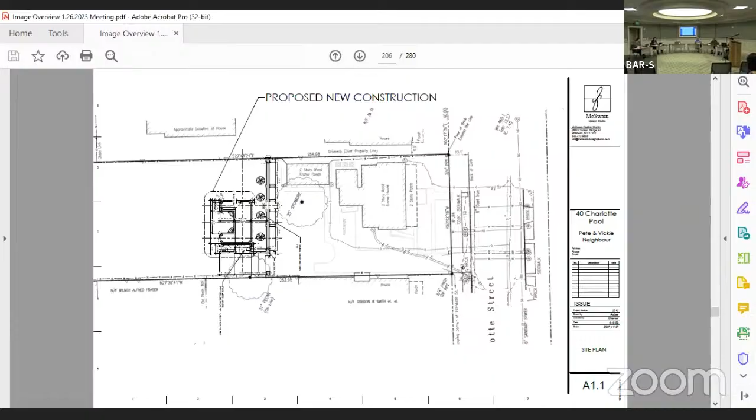Frankie, if you'll give us city staff comments and recommendations, please. Proposed changes appear to be minimally visible and limited to portions of the structure that can be seen over the wall. However, staff do have some questions.

We're curious about what are the materials and the finish of the parapet wall. We would request additional elevations, including a street view, if that section number 3 is not what can be seen from the street. So, what exactly we will see from the street, how thick is the ornamental wall, and is there more than one? And what portion of the mechanical room can be seen above the wall? Staff recommendation is to defer for additional information.

Thank you, Frankie. Did the applicant want to respond to or clarify anything raised with the city staff comments and recommendations? Yes, we were going to match the materials of the new ornamental wall to the existing wall, which is a standard stucco wall. We were going to use CMU and then brick stucco with the brick. There's an ornamental brick cap on top, so the wall would match what's existing on the site.

All right, public comment and the applicant's presentation is now closed. We'll move into board discussion and a vote.

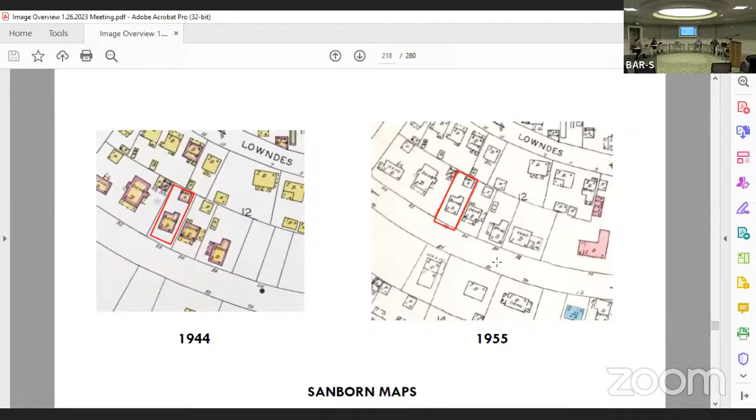So the roof is a pyramid roof, and the home faces south. The proposal is to put the panels on the east and west sides to minimize visibility. The existing roof is shingles. I walked up and down South Battery to see just how visible the east and west sides are from the street, both sidewalks. There's a huge live oak which screens most of the view from the angle of the street. There's a smaller couple of crepe myrtles which really don't screen anything at all.

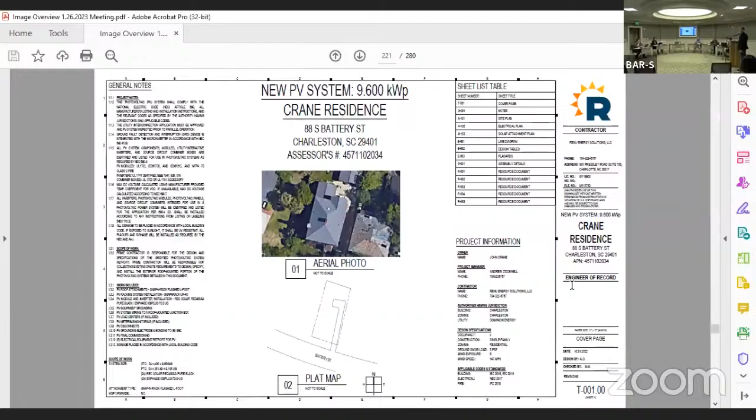The whole majority of this package is really technical drawings and specs of the panels and inverters and the rest of it. So in terms of appearance and visibility, they really don't add much to that situation. Do my fellow board members have any questions for the applicant?

I'm good for the moment. I'm trying to pull up some photos. Thank you. Do we have any public comment?

Well, Historic Charleston Foundation?

HCF has reviewed the application for solar panels at 88 South Battery. The existing roof is not historic, and conceptually we have no objections to solar panels. Instead, we suggest that the solar panels on the sides of 88 South Battery should be pushed back from the street so they will not have an impact on the streetscape, especially on the more exposed western elevation of the house. There's more space to be had there.

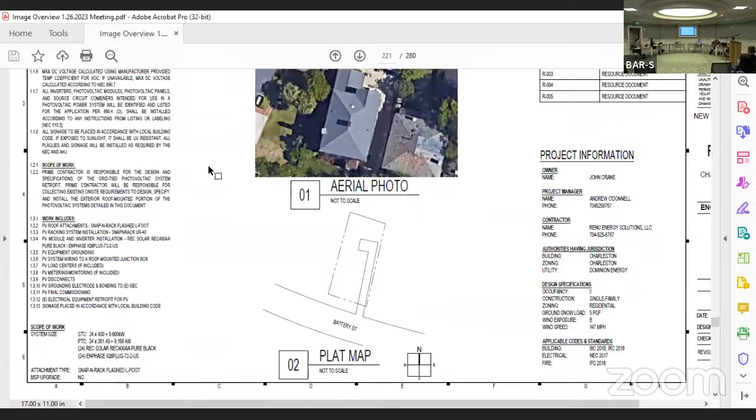The question of viability is not ours. Right, it's just what's approvable. Well, he's saying, is it viable, whether they have enough panels because visibility is limited. We've certainly heard that before. It's sort of a push and pull between how much can I get approved, and is that enough to make it worthwhile?

Like the ones on Water Street that we approved, they have about 17 panels. That was definitely pushed or minimized because of visibility. I would love to see it utilized if it can be done.

From the drawing that his contractor provided, it looks like it's mainly three panels here that staff is questioning the visibility of. So if it's maybe possible to push them back and have them further back on the roof, that might be a possibility, I'm not sure.

There's a lot of shade there from the neighbor's tree. Unfortunately, trees do count for shade. They do count for shade, you're right about that. Yes, sir.

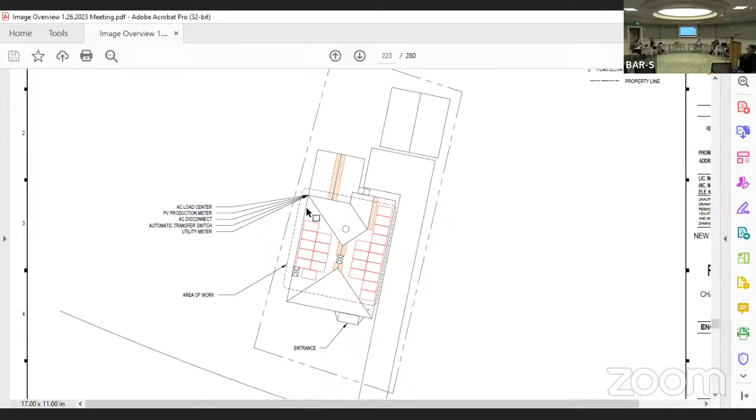Is there visibility from Murray if you look through, do you know that? Murray Boulevard, right. I don't think we were able to find a line of sight from Murray. We were on the other side. I didn't know if the long view through some of those lots, you can kind of see through, because I think it looks like on Lowndes, or is that Lowndes or Gibbs? Those houses behind are pretty tight together.

I think to Frankie's point, if your contractor or the board agreed, potentially could see that maybe those three right around that front chimney are expendable, or possibly still able to put beyond that. Does it still provide what you need, or is this the absolute minimum of what's necessary? Because I think if some of those on the west side were minimized, that might go a long way towards helping here.

Not to push the can down the road, but is it fair to ask that a staff member have a site visit and frankly determine what reduction would be needed to make it acceptable? You wouldn't have an issue with that. That's a great point, because again, I'm totally relying on staff evidence and visibility of these panels, and I think that's a good suggestion.

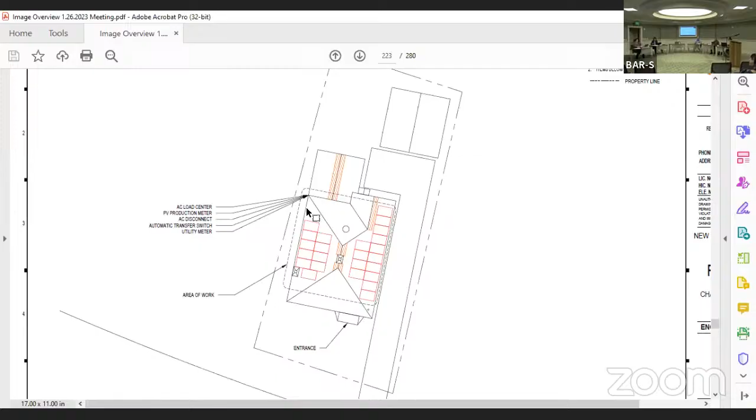7 Smith Street is requesting replacement with simulated divided light windows. It is not surveyed in Harleston Village, circa 1940, in the old and historic district. This is the location on Smith Street. Existing site photo. Next, photos of Smith Street, and Sanborn maps showing the history of the property. Over to the applicant.

Good evening, I'm Doug Gottschalk, the architect for a petition that was presented and approved by this board a year or so ago, to the rear of this property. During construction, while renovating and remodeling the interior of the main house, it was discovered that the windows of the existing house, built in 1940, are in horrible condition.

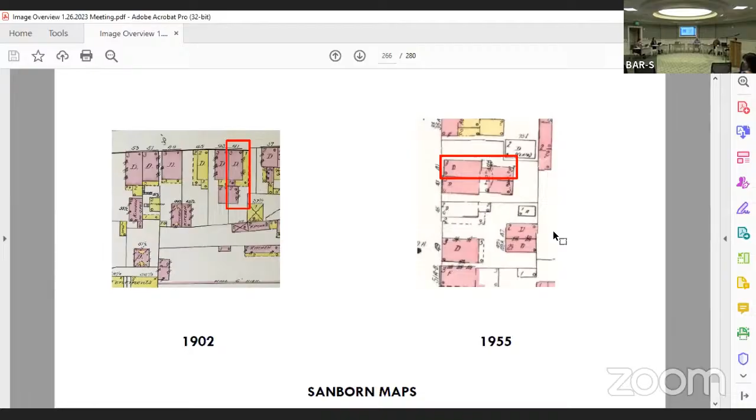41 Tradd is requesting replacement windows including change of mullion size. It is a category 2 in Charlestown, circa 1746, in the Old City District. This is the location on Tradd Street, an existing site photo, context of Tradd Street, and Sanborn maps showing the history of the property. I will turn it over to the applicant.

The client wants to, first of all, the windows are only an inch and an eighth thick, and they're very weak with the 3/16. The client wants to go 3/8 because the rest of the house is 3/8.

There are 26 windows on the main house at 3/8. These 4 that you see here on the left, that's 41 and 43 in the picture—those 4 are 3/16. The rest on the main house are 3/8. The dependency is all 3/16, but I'm not worried about those. I don't know how old any of these windows are. They all look old, the 3/8 and the 3/16—I don't know which one's older, can't tell, they look about the same age.

Go to the next slide—that's a picture of 43 on the right and 41 on the left. 43 has 3/8 throughout the entire main house. I don't know what's on the dependency there.

Those windows do look newer than the ones on the side of 41. I don't know the age of those either, but I know that we've replaced some of them there with 3/8.

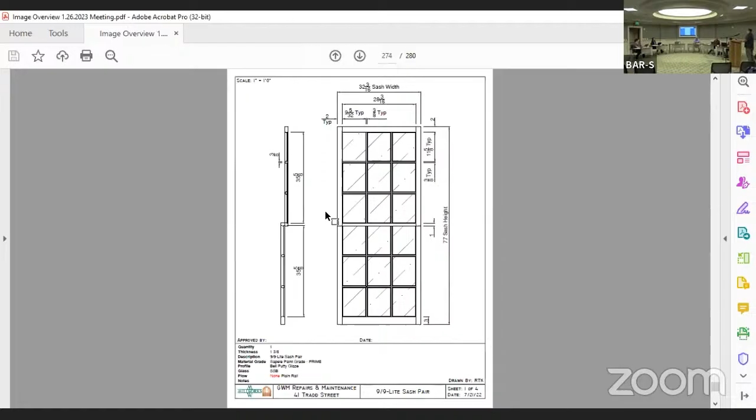So Keely, question. Questions for the applicant?

Thank you. Do we have anyone speaking from the public?

Okay, with the Preservation Society of Charleston. Based on the submittal, it wasn't clear which windows are proposed to be replaced and to which muntin width, although I appreciate the clarification that they're going to the larger width. The PSC feels more information is needed to understand and evaluate this request, as it is possible changes made to the windows have gained significance over time. The Secretary of the Interior Standards advised against conjectural changes, so we request clarification on the age of the windows and justification for the proposed alterations. Thank you.

Historic Charleston Foundation, we have comments with the Preservation Society. We reviewed the application to replace the existing windows at 41 Tradd, and change the dimension width. The application doesn't provide information as to the age of the existing windows at 41 Tradd Street. It appears from the submitted images that the existing windows are historic.

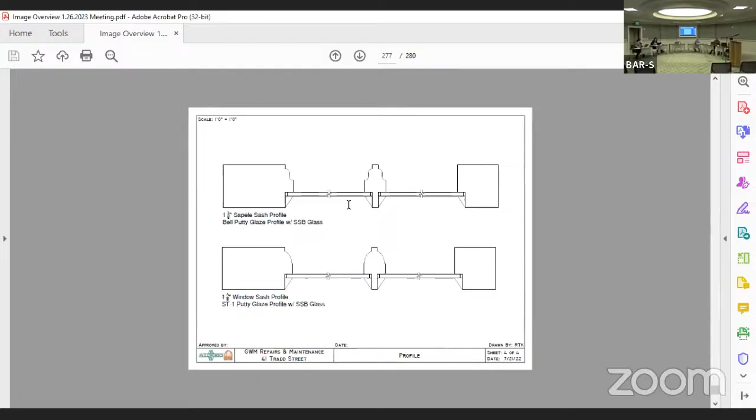Frank, you can give us the staff comments and recommendations, please. The observation that as the structure was built in 1746, the proposed mullions are historically appropriate in size, but it is probable that the narrower mullions tell the story of a later alteration, and that no historic documentation for the wider mullions has been found. Staff comment is that we are possibly removing evidence of historic changes to the house to tell its story. Staff is recommending denial.

Did the applicant want to respond to or clarify anything raised in the public comment or the city staff comments? So I just want y'all to know that I'm happy to look into the age of these. Can't tell which one's older without pulling them out. I know that the one I pulled out, on the back of the house that I did remove, was very old, and it was 3/8. The ones on the front, I just can't know until I start pulling them out.

They may be the older ones, but it's not going to change all the rest of the windows to match those four. So it's all a matter of matching the rest of the house, and there is also one other house I left out, at 53, that also has the 3/8 mark.